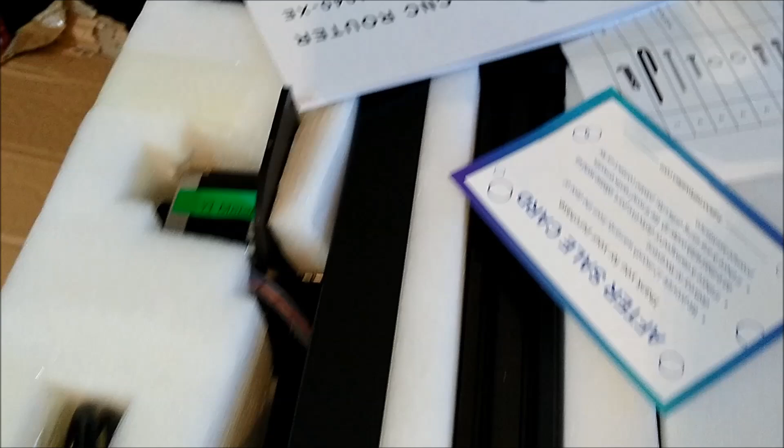So far, so good, I see parts. What I'm looking for is to see if this looks like it's been put together or not. Somebody might have just picked it up, said I can do this, then said no, I can't do this. So I'm hoping that's the case. Now, it looks like something's missing here, I don't know what it is yet, we'll have to find out. So I'll keep digging.

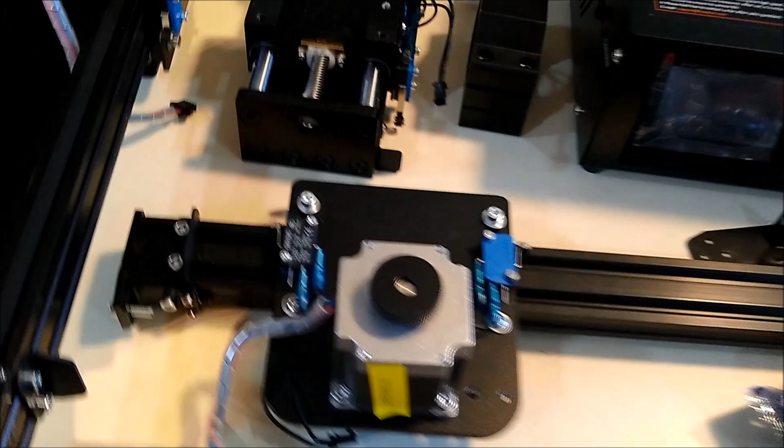Episode 1, 4040 XE from FoxAlien. I am very excited about this. It looks like all the parts are here, and it looks like this has never even been assembled. Someone started putting it together or did something - there's a couple of chips, little paint chips maybe, here and here. That's about it. Nothing looks like it's ever been hooked up, so I'm not going to worry about this at all. I'm going to put this thing together.

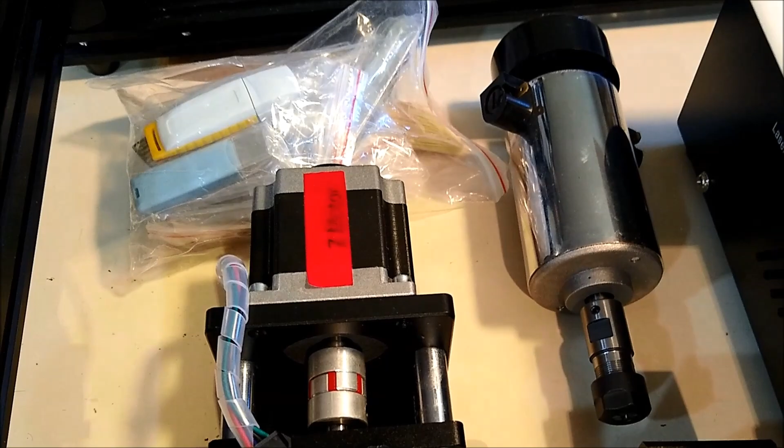So I've got all my parts. There's my cables, a little box of screws, probably a couple tools, maybe a couple hex wrenches. There's a bag full of other accessories plus the flash drive. There's my 300-watt spindle, I'm going to swap that for the 500-watt I have. There's the spindle holder, there's the Z-axis. Now this has dual Y motors, Y1 and Y2, and those run in parallel off the controller. And here's the controller, it's a nice-looking controller. I'm not sure how noisy it's going to be, we'll find out. Some drag chain brackets.

There's my X-axis assembly, this will attach - my Z will attach right to that X-axis - and some clamps. So this really is complete. And there's my drag chain with all my cables, and drag chain guides, things like that. This looks really good. I'm excited about this whole situation, this is going to be a really good time. So I'm going to get putting this thing together and we'll see how it goes together.

So here's the contents of my accessories bag. There's your Z... your Z checker, what's the word I'm looking for... your Z down stop. Yeah. Some tools, micro SD card, along with a flash drive. And look at all those tools, they got lots of tools. And they even gave me a little brush and a waste board and a piece of board to play with. So this should be good.

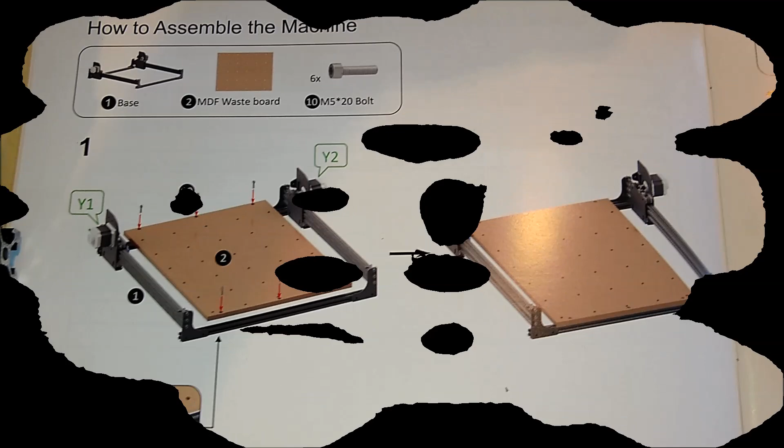Step 1, we're going to assemble the waste board using 6 M5 by 20 millimeter bolts, and we're going to put that to the base. Easy peasy.

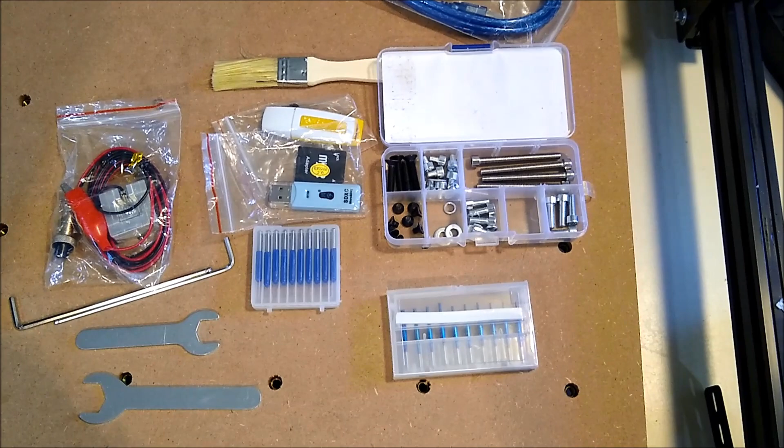This 4040 XE kit came with a nice little box or bag full of accessories. Nice box of bolts here for all the assembly, everything's marked on the front. Got a flash card, got a USB drive here - actually I see two USB drives. There's your Z probe, a couple of Allen wrenches, a couple spanners for the collets, a brush, USB, and a nice assortment of cutters.

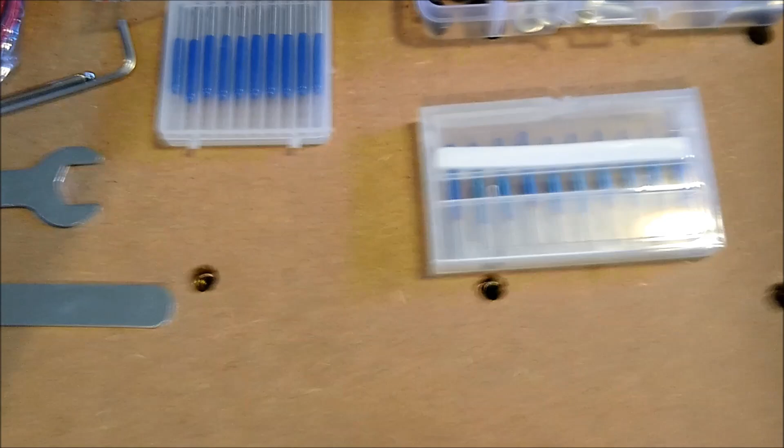I'm excited about that. So I mounted the waste board, 6 screws, no big deal, easy peasy. But I want to measure corner to corner to make sure that it's not jacked or crooked. So I'm going to check that.

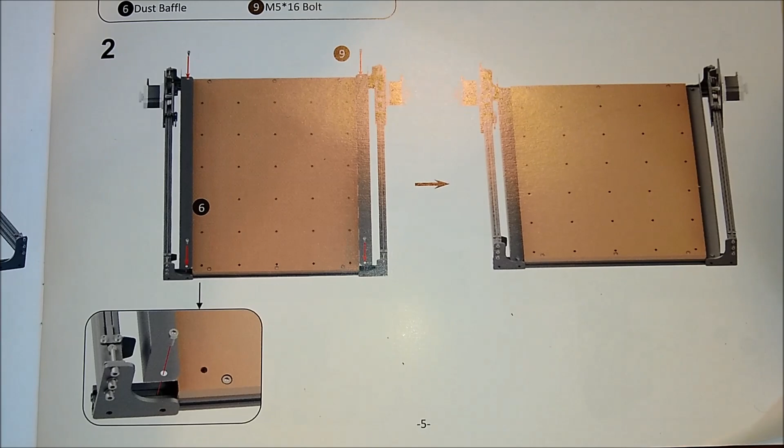Next is the Dust baffles, one on each side along the Y-axis, and that's simply 4 M5 16 millimeter bolts. So we'll put them on, and those are going to go right along the sides here. It's a beautiful thing, and that'll keep some of that wood chips and metal chips, hopefully eventually, from getting into my rollers and belts.

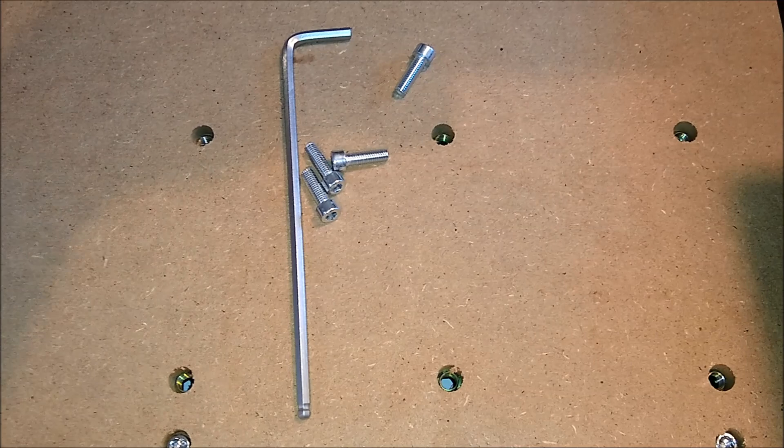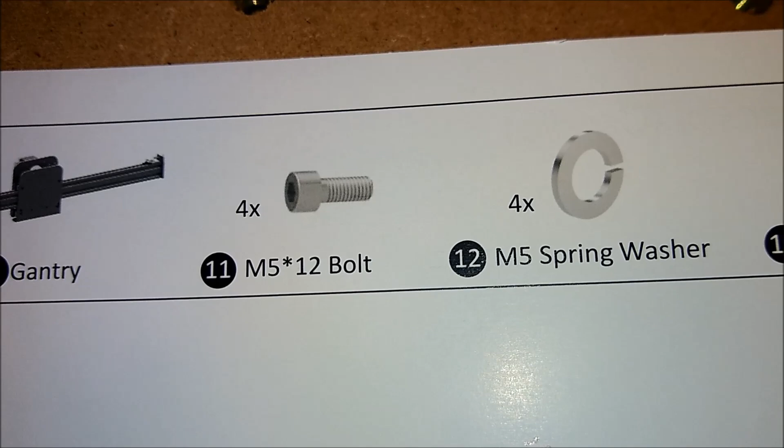This is a really good manual, they don't need a lot of words, they're just showing you pictures of what to do. So we're going to take our gantry, which I've just laid upon here upside down, and we're going to set it in place, and we're going to attach that using 4 M5 12 millimeter bolts, 4 M5 spring washers, and 4 M5 washers. Should be plenty easy, looks like it bolts right up there. Make sure it's square, and off we go.

And then we're going to put the Z-axis assembly on there next, and that should be easy as well. So we'll just go ahead and do both of those.

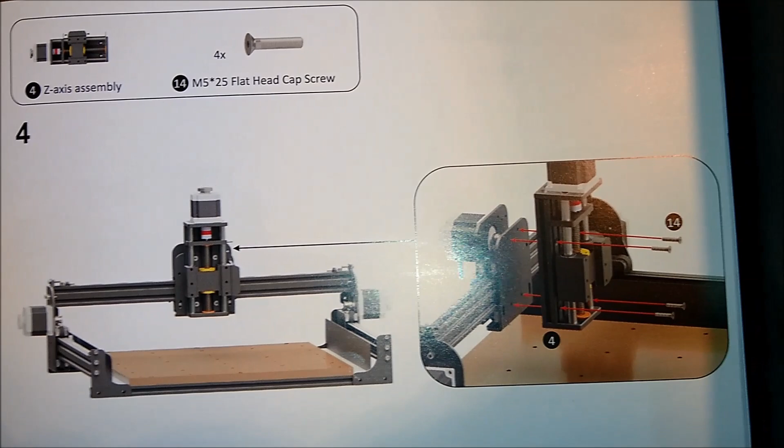So here's my trick when it comes to leveling. When you're trying to level your bed, level the head to the bed. What I do is hold it tight to the gantry and then lower it down, and you can see how big that error is there. So that gantry's got to go back some. That makes it easier than trying to hold it flat here and try to see the small gap on the gantry. You see what I'm saying?

So that works. If you have to level it, give it a chance, and it gives you a lot more to work with. Well, that took care of assembling the gantry onto the rails and the Z-axis onto the gantry.

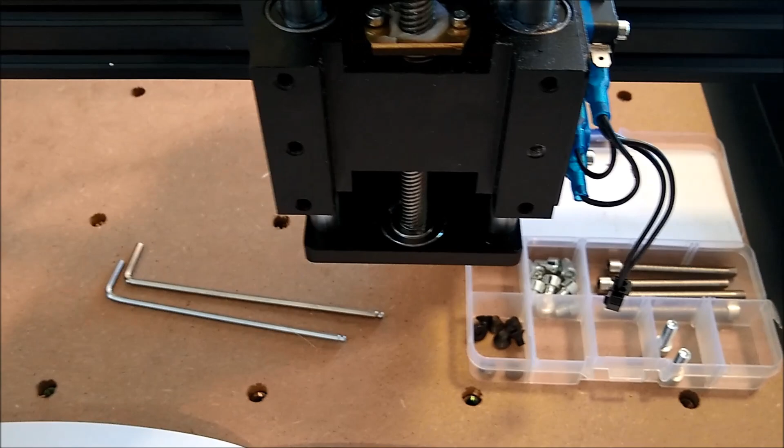The only better way it could have been done, I would think, would have had to have some locating pins in the pieces. Because if you don't have a square and you're just guessing, you're not going to get the square. So I had to use my trusty square. Worked out really well.

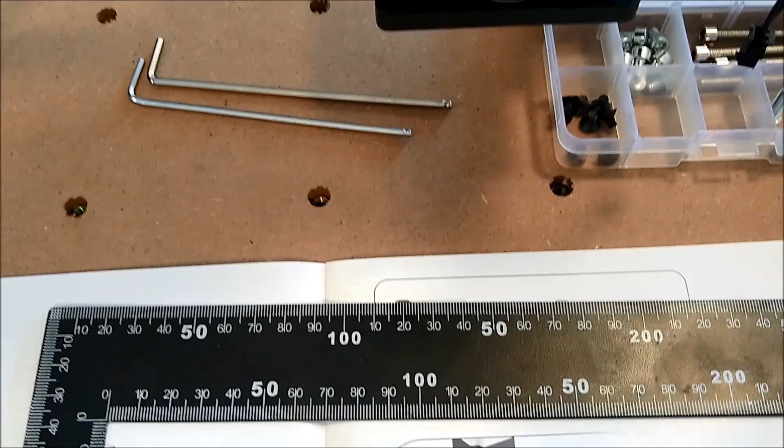It's a Dollar Tree special, so if you happen to see these at Dollar Tree, they have both an inch and a metric side. I have two of these, and I'm going to put them on opposite axes of my machine so I can keep track of what's what and where's where, and actually set it at zero and just pop my parts in there and be done.

So this looks like it's going to be fine. I'm on to the next step, which is to put in my spindle mount and my spindle. This is getting good. I can't wait.

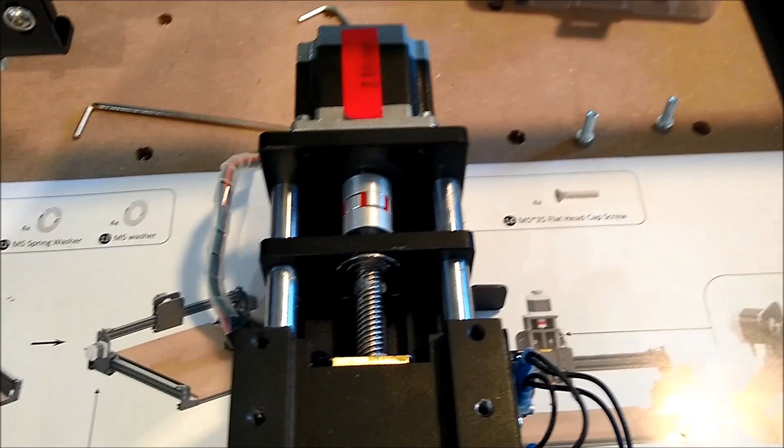Now the Z-axis assembly is going to get assembled onto the gantry. Four bolts, pretty easy. Again, I'll use my square to make sure everything's square to the base, square to my spoil board. All right, four bolts. Looking good so far.

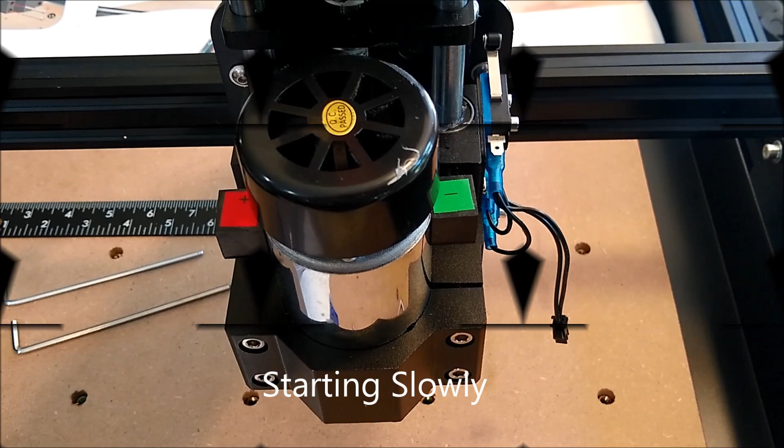I decided to put the 300-watt spindle in first because let's just get used to one thing at a time. I have a tendency to get ahead of myself and start putting in things before it's time, upgrading things before I even get the full gist of the machine.

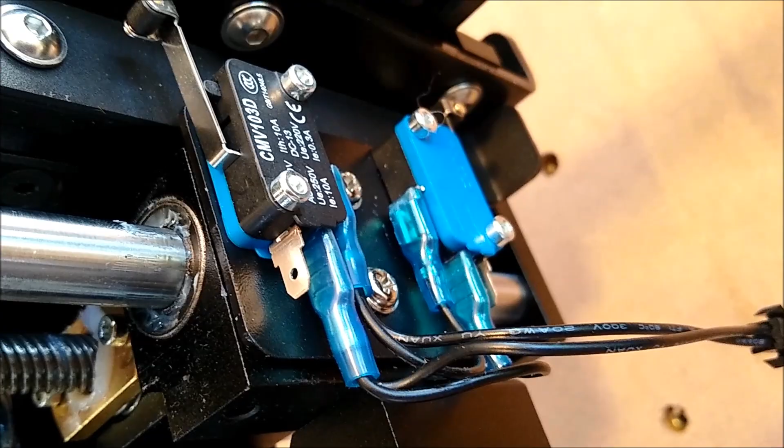This looks good though. It has some nice stop switches here on the Z, both north and south. It's got two on the Y, and it's probably got two on the X as well. I can see one on the X anyway. So it looks good. This will be a great little machine. I can't wait to try it.

So the next step was to put these brackets on for the drag chain. There's one there, and there's one there, under, there it is over here.

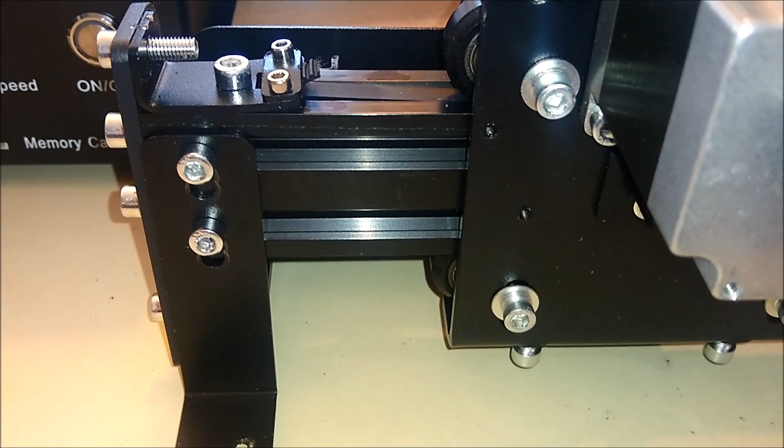Not too bright here. I was confused because I had the carriage forward, and the two loose T-nuts that go in here were way down the other end, and I was trying to put things down there, and I'm like, this does not look good. Doesn't look right. So I was able to figure it all out all by myself, and we're back in business again. So we're going to move on to the next step.

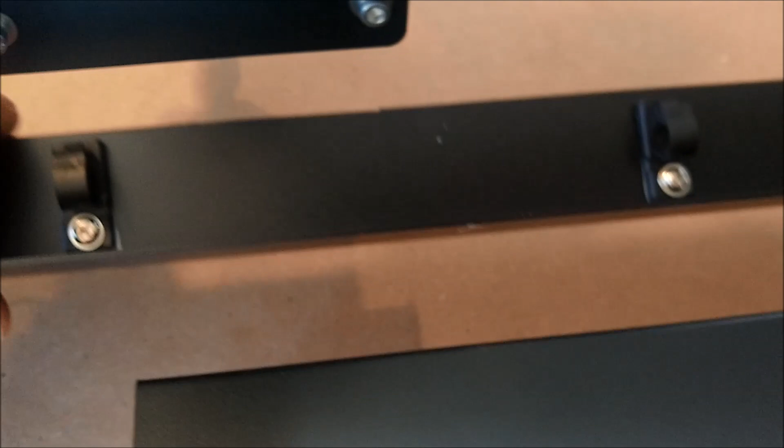The next step is to put the bracket on for the X-axis drag chain. So we're going to look for that. It's going to take some bolts. We're going to take four M5 6mm bolts, the drag chain bracket, and another small X-axis drag chain bracket shown there. Okay, so we're going to put this on there, and it should be just a few bolts, and off we go.

So that bracket was easy, two bolts, and then you can see underneath there's some clips that'll hold everything together. Let's turn on our light here. And then this one, this little bracket here, two bolts, it's going to sit just like that. So that'll be easy. We'll get that done, and we'll see what's next after that.

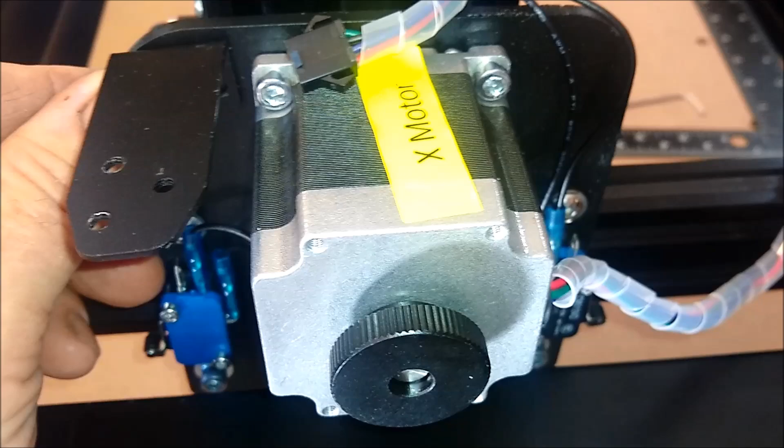I'm getting so excited. This is so close. Well, I have to say, this has been pretty easy. I ended up with two straight bolts. Don't know where they go. I don't see any place else where I need to worry about bolts, but we'll see if there's anything down the road.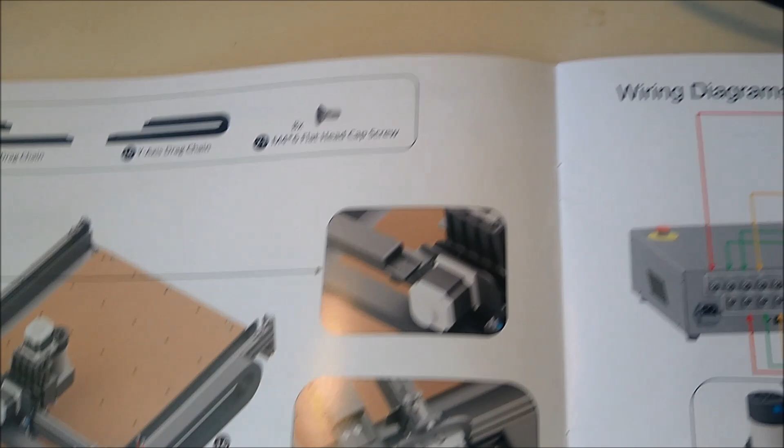What's left here are the wiring diagrams. So all I'm going to really do is plug in the other end of my Anaconda here.

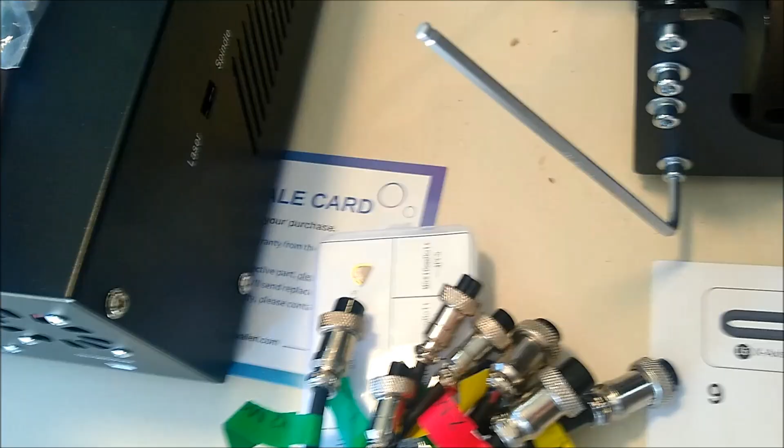Just going to plug in these, and those are going to go to the back of the box. The box is really well laid out. Let me spin this around so you can see it. All these will go right in. Each one has its own label, each one has its own place. You can't miss it. Even I can do it.

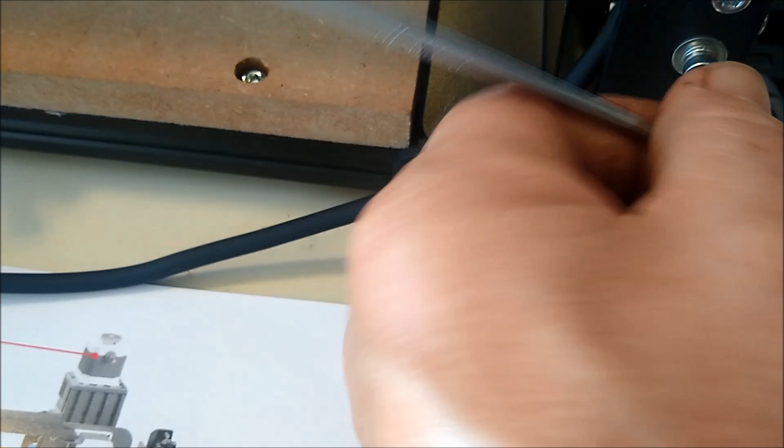One thing I'd recommend is going around on each one of these bolts and giving them a little snug, maybe using the force you'd use on a quarter-inch socket. Go around and tighten up all these bolts, because in shipping I noticed on another FoxAlien machine, the 3018, all the bolts were just that little bit loose. You don't want to crack anything, but this isn't plastic either, so you can go ahead and give them a little snug.

All right, so we're going to go ahead and plug things in. I've got all my limit switch plugs to put in here. I've got a lot of these different limits, motor, power, all that good stuff. This is going to be all done in a minute.

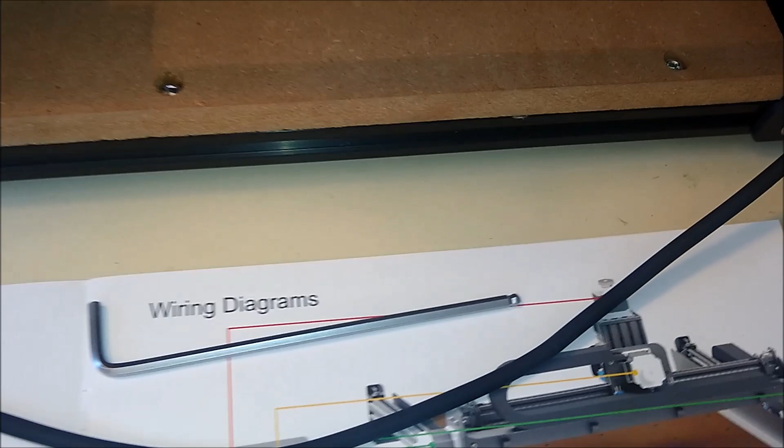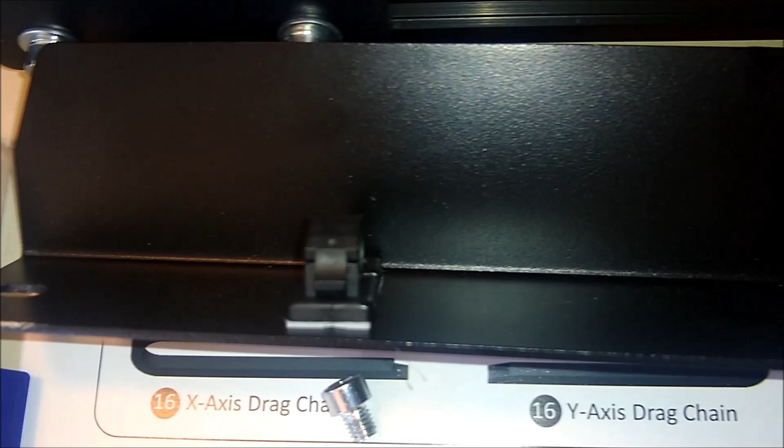Here's a tip where you could avoid some aggravation. When I got the drag chain all installed, I still had a Y wire to put in here, and that actually fits nicely under the drag chain. But if you look at this, it's got these Chinese finger lock things, and looking at it from afar, I couldn't figure out how to get them open. So I'm just going to open them up, drop in that Y cable, and then put it back together - it'll be a lot easier. That's something that might aggravate you too, trying to figure things out with your fingers when you can't see under there. So let's see how it goes. Put it back together, and we should be ready to roll.

As I installed these, I like to use the bottom row first so you don't have your fingers getting in the way, trying to put too many at once. So you do the bottom row first. This one's reserved for the probe, for the Z probe, and I've got that somewhere over here too. That'll plug in and run to the front. So I've got left: my Z, Y2, Y1, X, and spindle. And we are ready to roll.

We got everything all hooked up now, and all I need to do is get some power to this thing. Got our AC 110, got our cord ready to go. I'm going to roll this thing around to another orientation and see what happens when we turn it on. Can't wait.

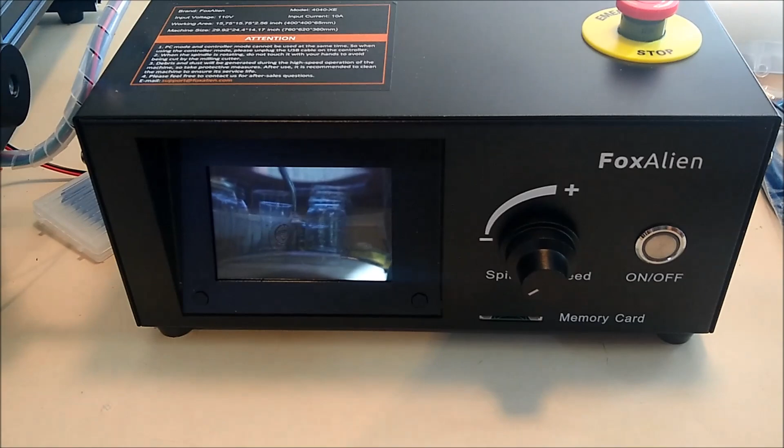So the moment of truth. Let's see how it goes. First try - oh, something made a noise. FoxAlien.

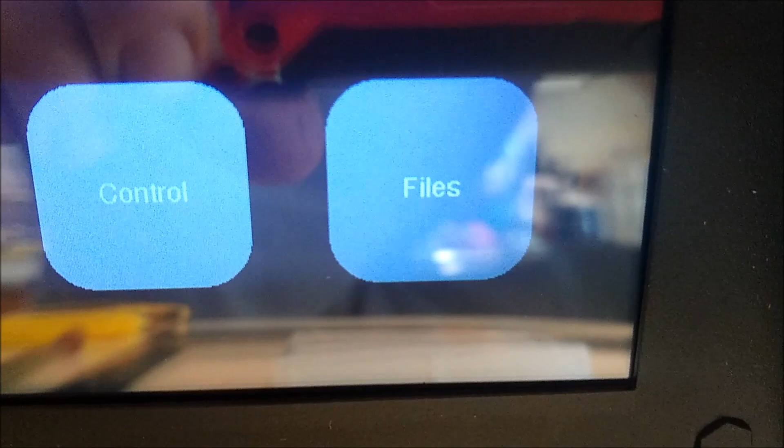That says control and files, which is your normal control.

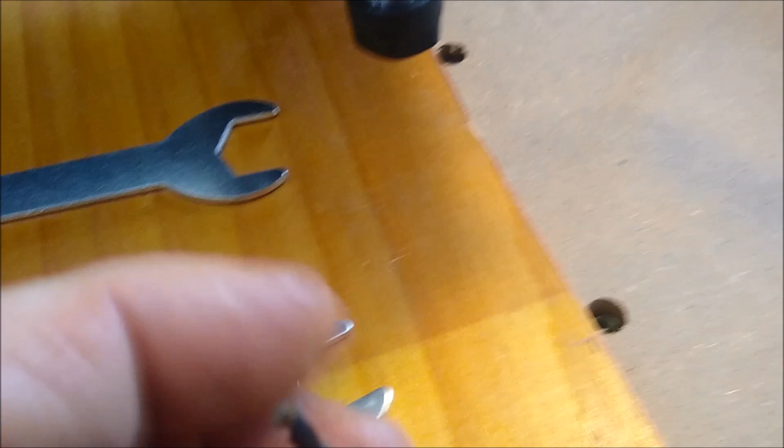What I did over here, I strapped in a piece of wood to play with. I've got a logo I want to do, and I already know I've done it on a small machine, on a 3018. I'm going to make it larger and try to fit it on a large board. I'm using an eighth-inch drill that I cut on my wire EDM machine. I'll probably lose it if I drop it down the hole. It's very flat, and since I cut it with a wire EDM, it's going to be nice and sharp. I can just take it out and sharpen it later too.

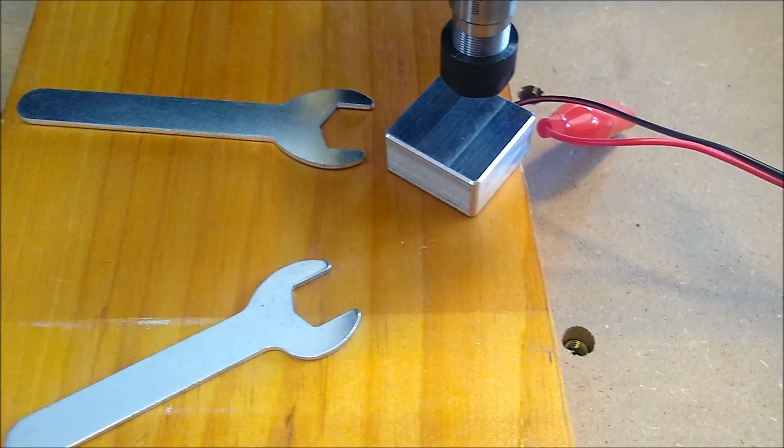So here comes the first try. I'm going to chuck up this little drill and use my Z probe. Here's my Z probe - you put that on the bit and put this underneath. You've got to raise it up, obviously. So I'm going to do some control stuff and see how it goes, chuck it up, and play a little bit.

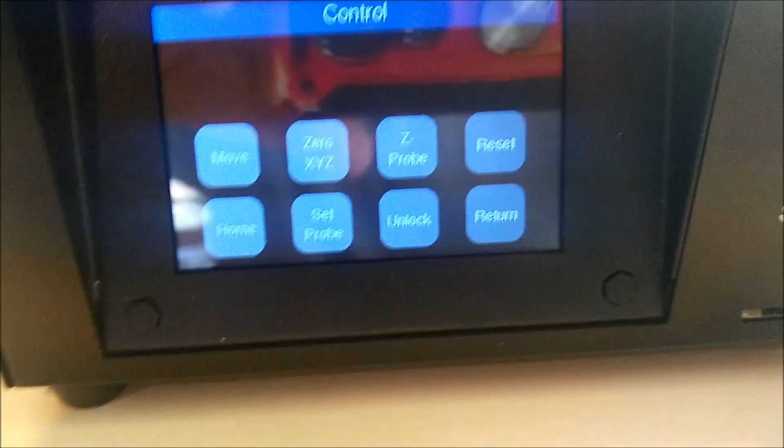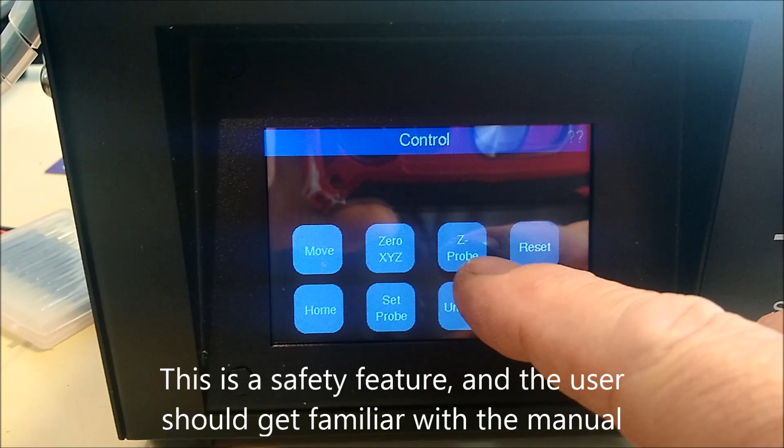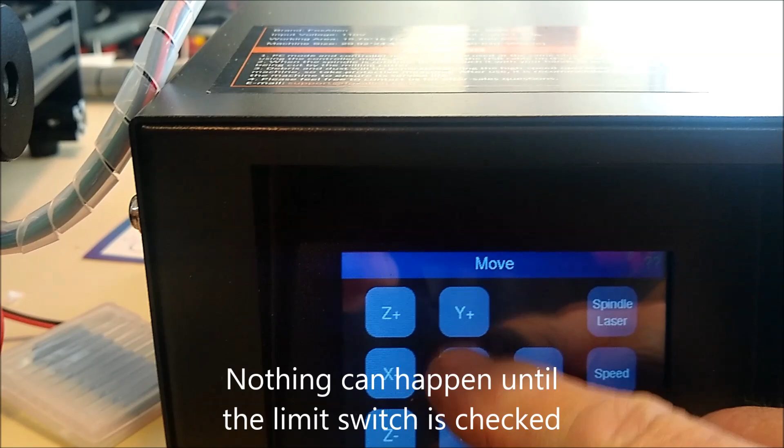So here we have the control side of the whole arrangement. What we're going to do is move something - first I think we have to unlock. No? Okay, move. Oh, nothing's happening here. I'm going to play around first. Reset? How about reset? Move - hey, we got to move. Let's see. Step, I don't know, I'm going to play with it. We'll figure it out. We always do.

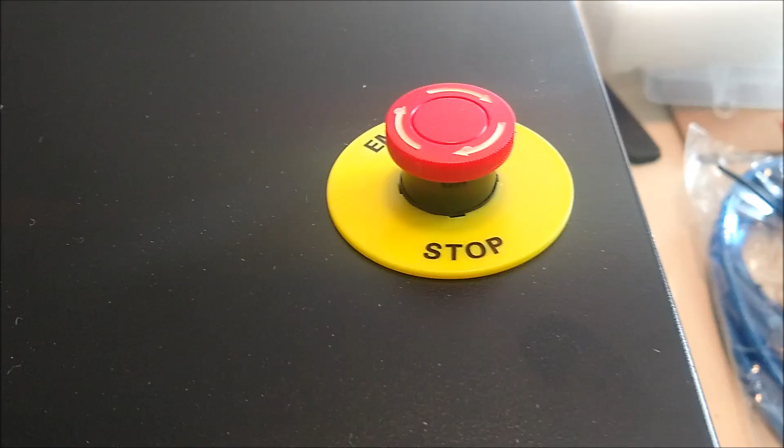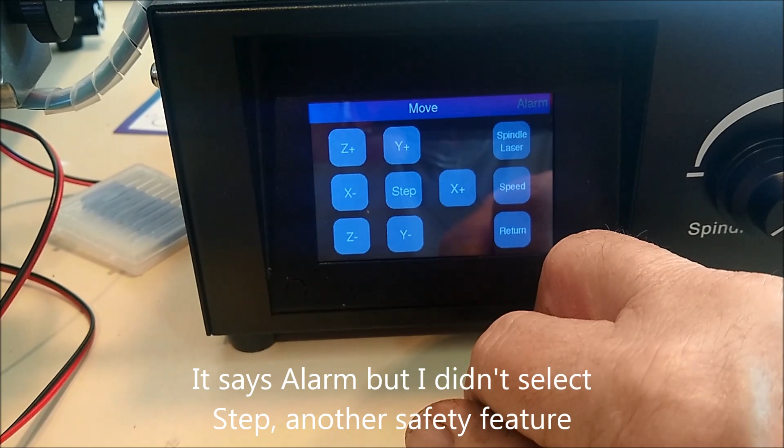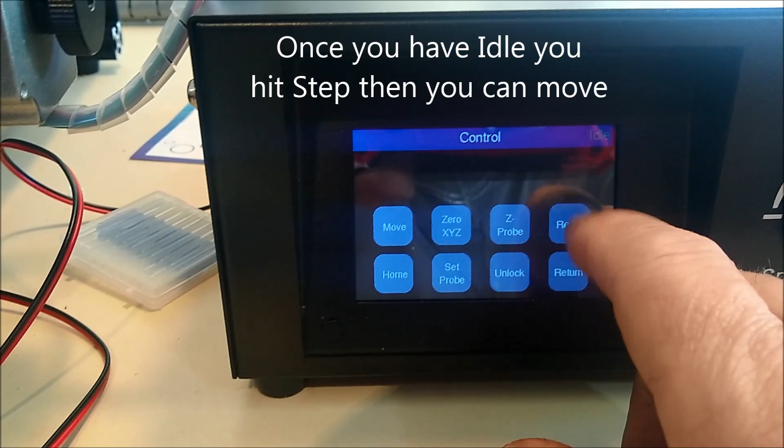I suspect nothing's moving because I haven't undone the E-stop. No? Let's see - oh, it's up now. See what happens, let's see if we can move this now. Move - nope. So I've got to make sure I figured out what's going on here. Oh, there it goes, it popped up. No idea, we'll return. Unlock, idle, move, Z plus. No, idle. Return. Reset - still says idle. All right, we're going to look it up and see what's going on.